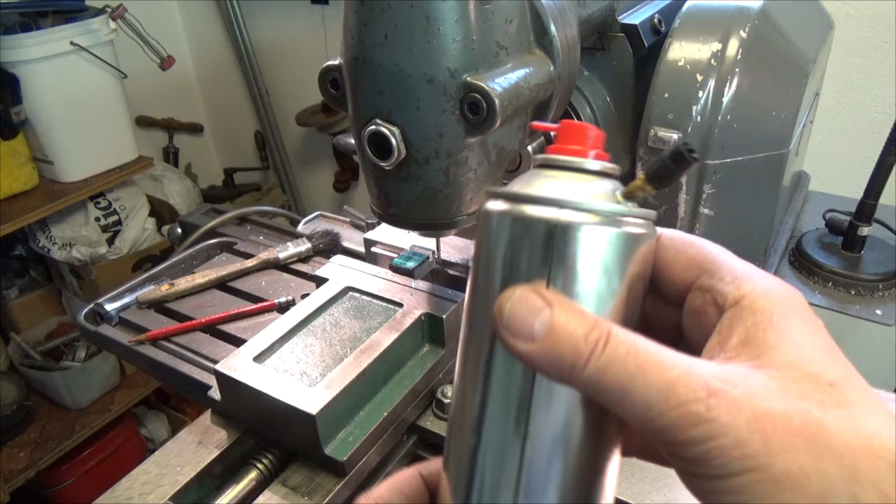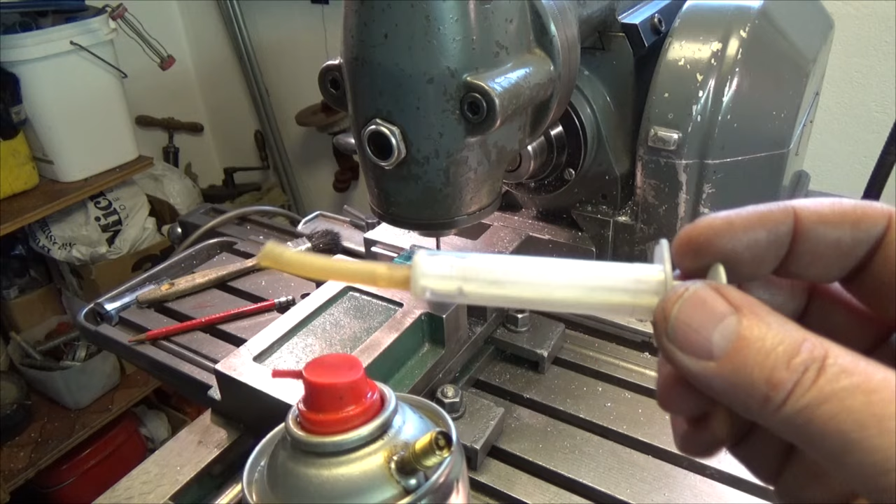I was getting low on cutting fluid on this spray can. As you can see, I have attached it with this valve, a car tire valve, and I screw out this in the middle. I don't know what it's called in English. In Swedish it's called kägla. And then I'm using this to fill it up.

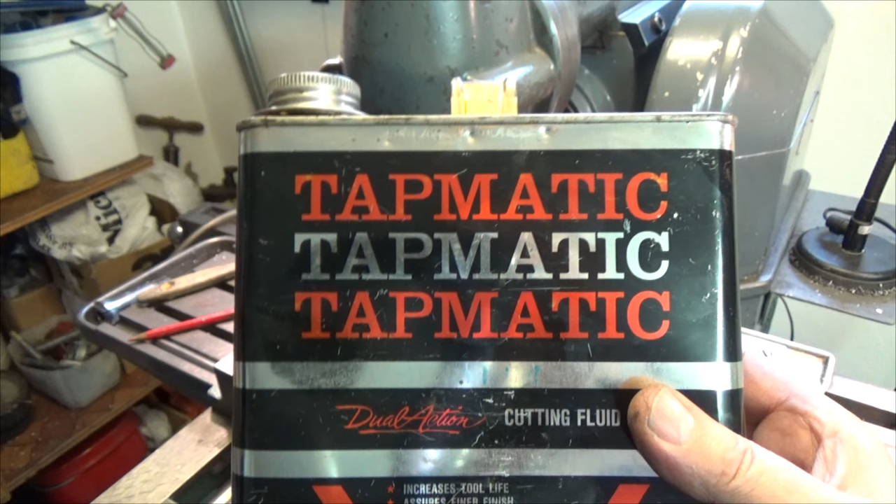And for cutting fluid I'm using Tapmatic. And this is especially made for aluminium. But the level is getting low in this container, so eventually I will run out of Tapmatic. I don't know if you can buy this in Sweden. In USA you can, of course, but I haven't checked if you can buy it here in Sweden. Anyway, let's go on with the milling.

Oh, and I fill this with 5 bar air pressure, and it's working great.

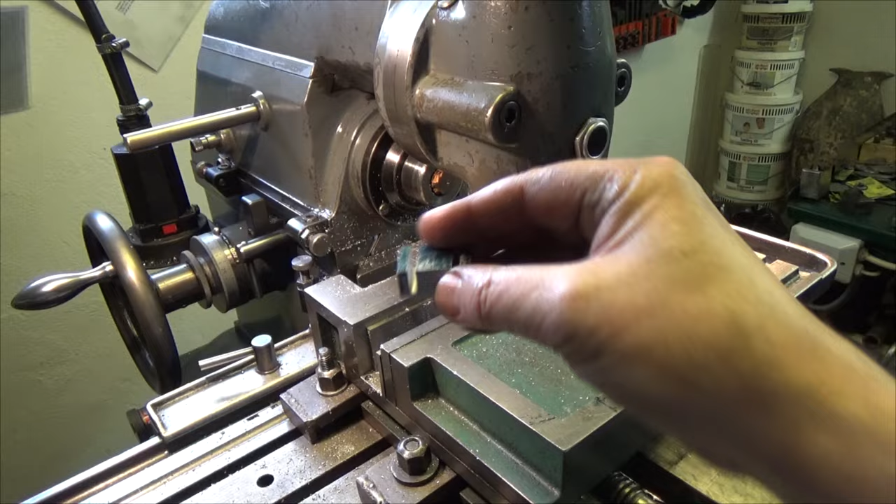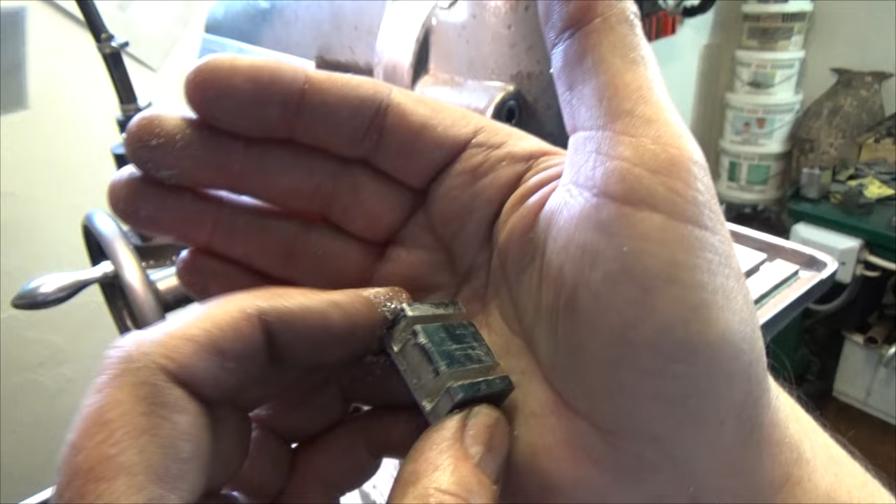Well, that went smooth, I think. No incidents. I do the other slits off camera, and if anything unusual happens, I'll let you know. As you can see, everything went smooth and all right. And I don't think I'm gonna mill a slot here in the center. Anyway, not just now.

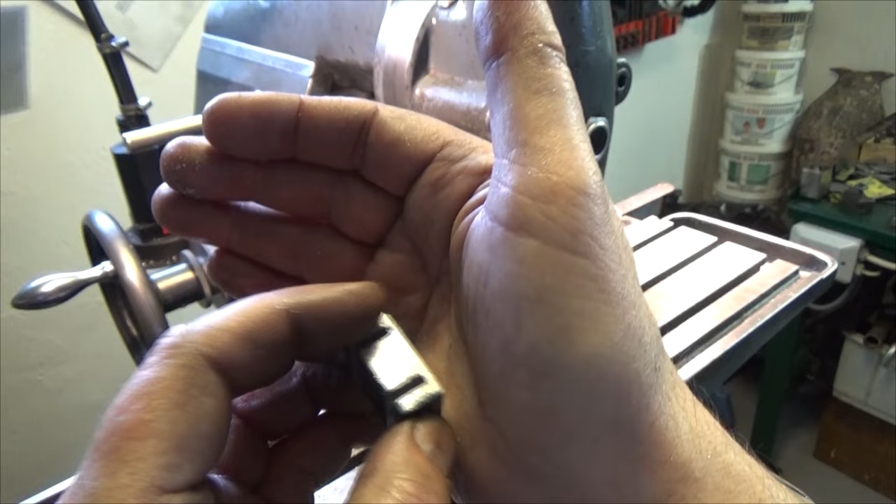And let's move on. Next thing, drill 2 holes. I have done that in the base plate, so I'm not gonna show this on camera, unless something unusual should happen.

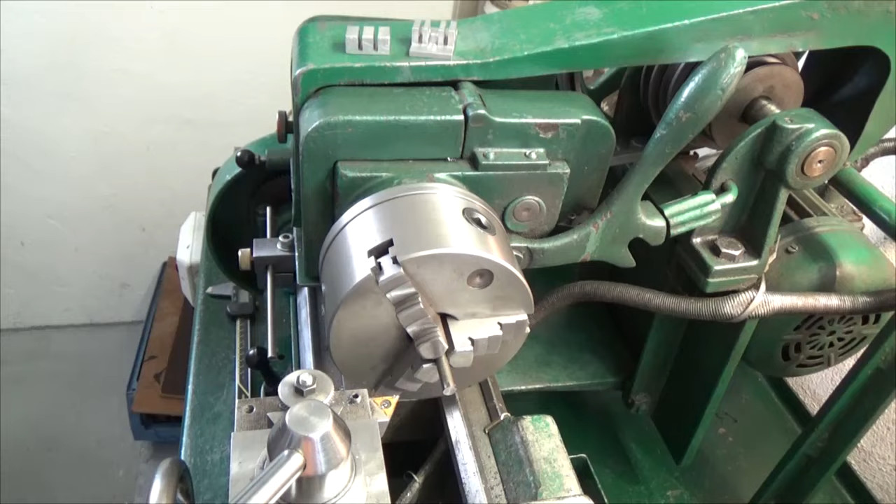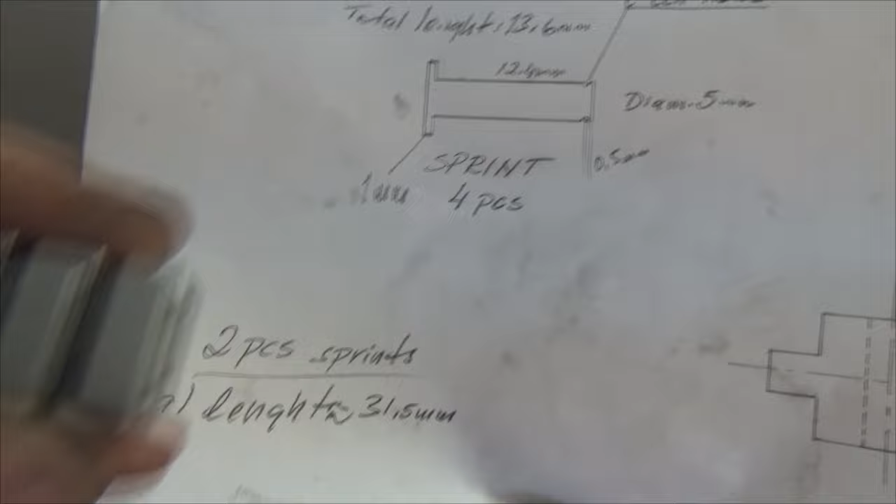Next thing to do will be to make 4 of these pins that go through these holes to lock the arms in place, and 2 little longer pins that will suit this top plate, and those pins are going right through here. Okay, let's start work again.

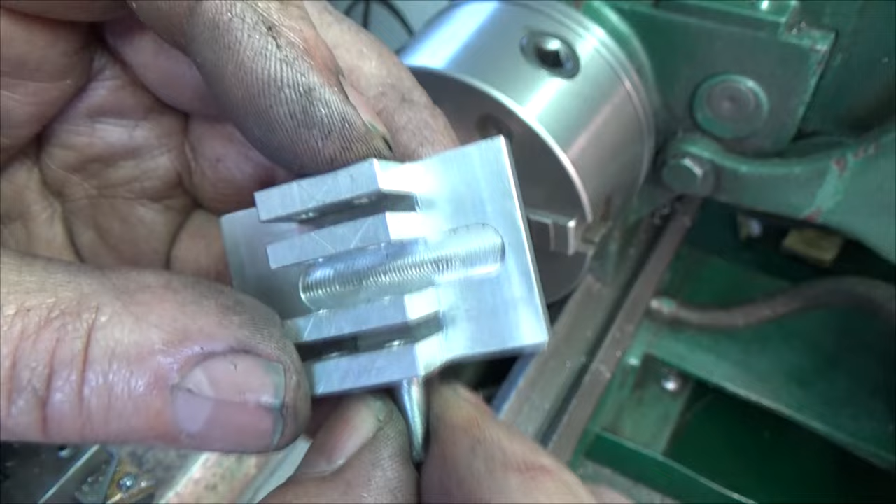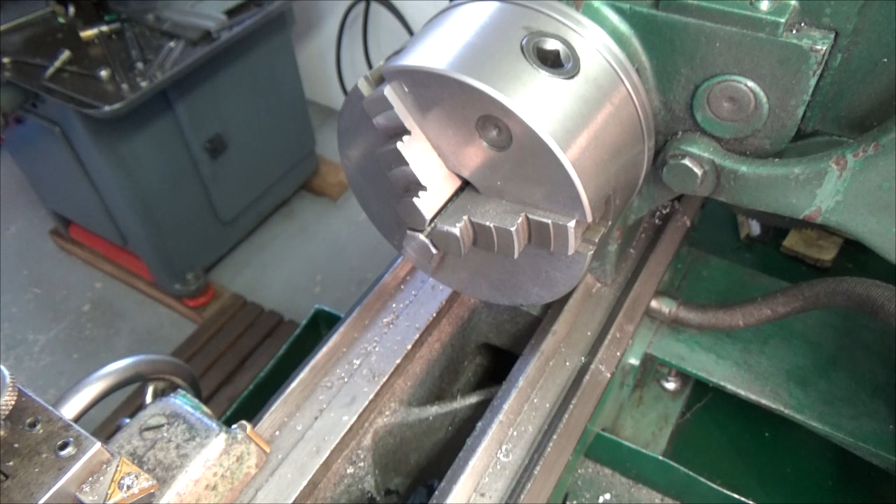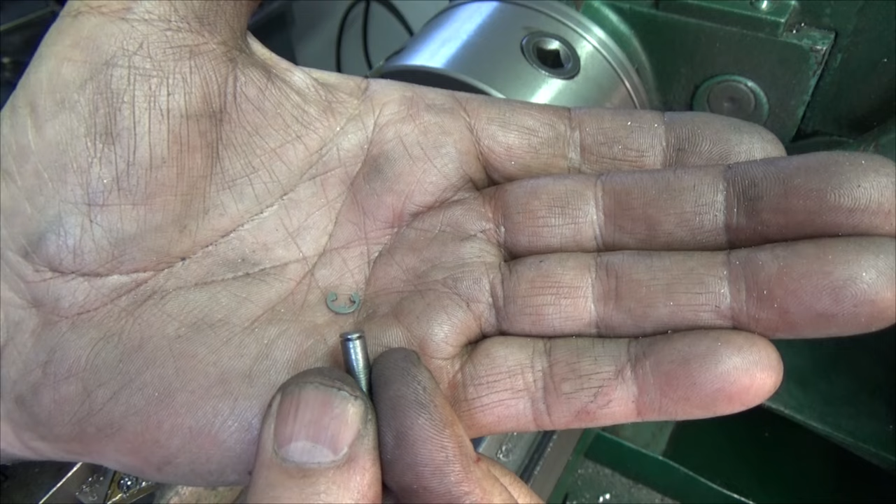Okay, here we have one of these 4 pins that's going in here, and this little C-clip will go on the groove to lock it. I got a few more of these to do, but I do that off camera.

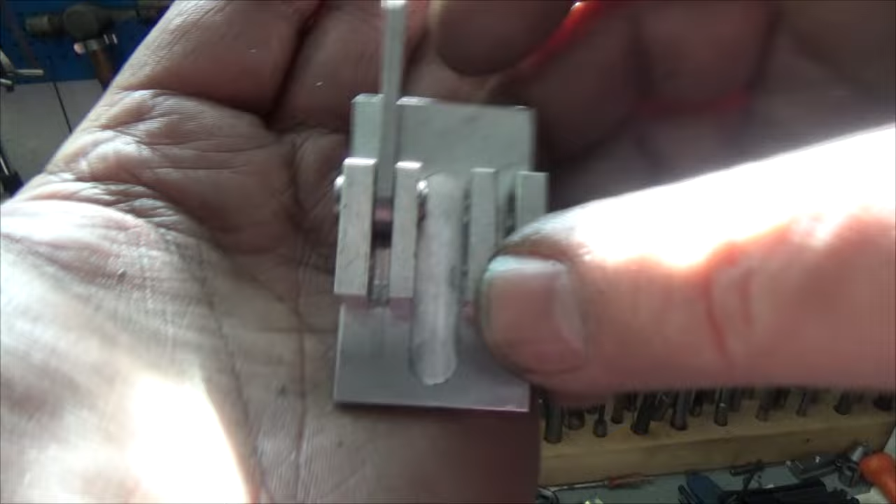Here are the pins, and there's one missing, isn't it? Well, actually not. I have mounted one for testing in the base plate, with the C-clip mounted too.

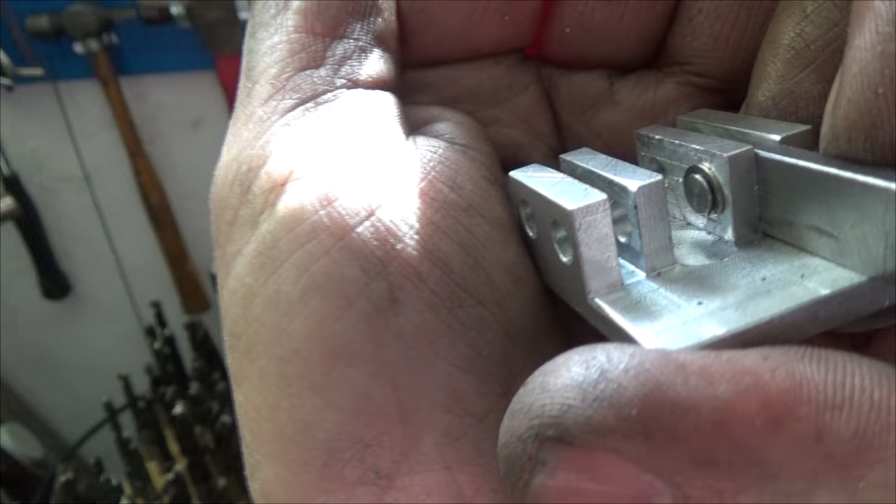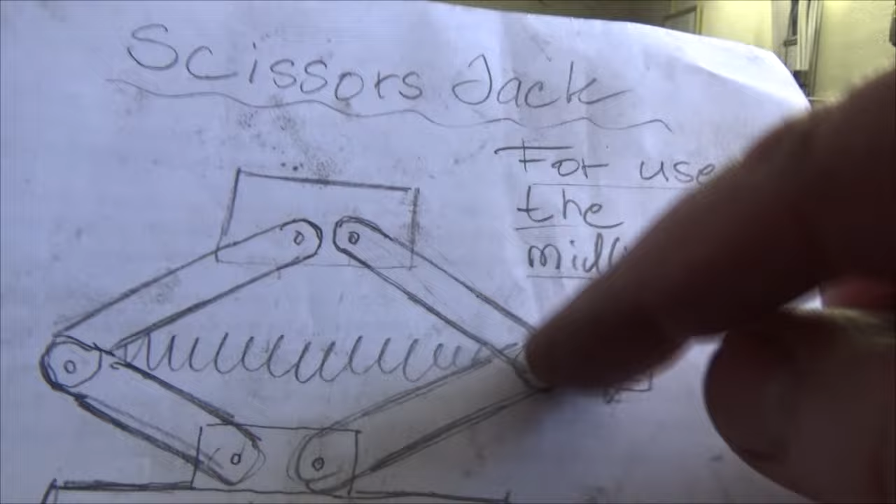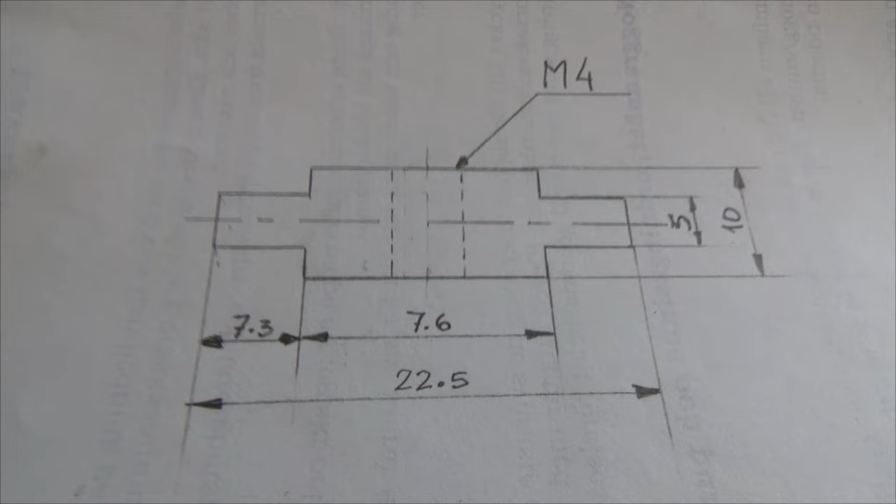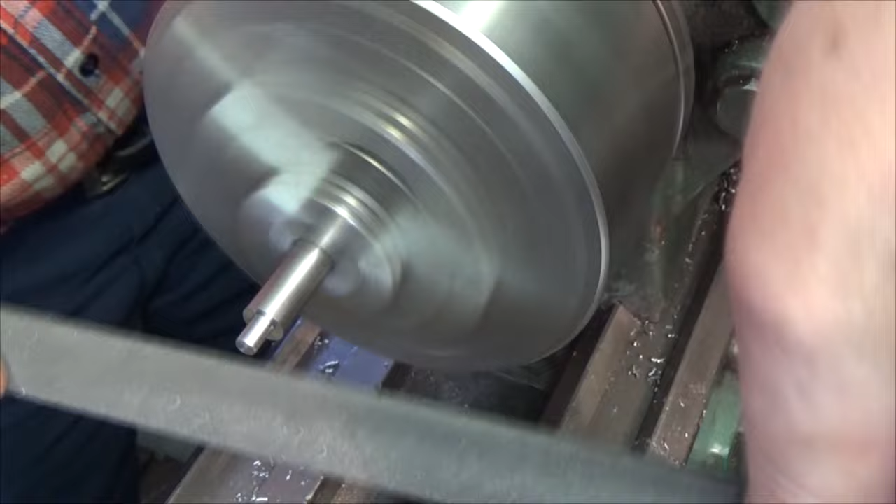Next thing to do will be these things that sit between these arms, and I have made a simple drawing of one. It looks like this, and one will be, as you can see, threaded with M4 thread, and the other one will have no thread on it. Yeah. Okay.

Oops. And here is the final result. I will now drill and thread this part with the M4 thread.

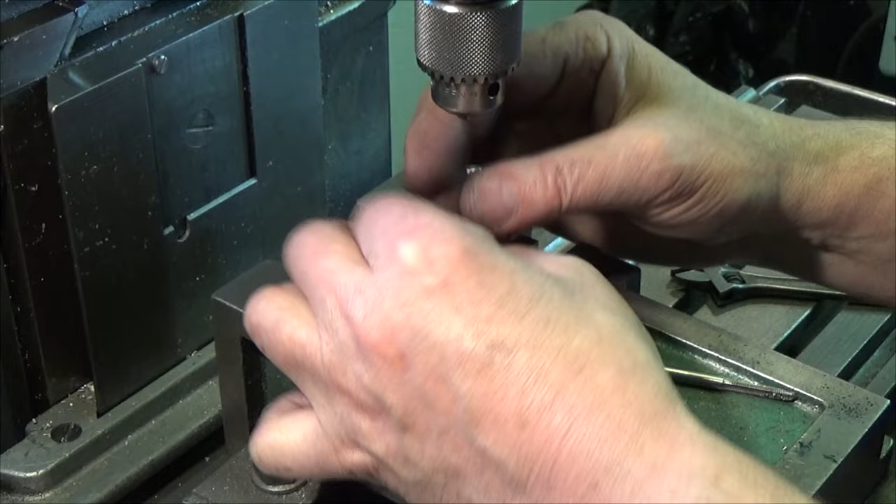Okay, it's threaded, M4, and the other one, which I have made earlier, I will drill a hole in this. Which size I will think about a while. I'll be back.

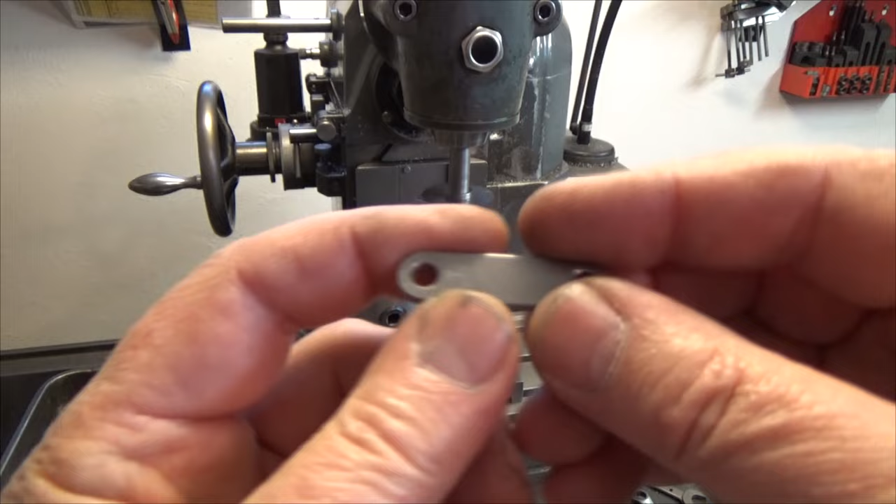On the end of these 8 arms there must be some sprockets, and I intend to use these. I have 4 of them, and first of all I will cut them in half, so they will be about 2 millimeters thick, and then I will mill away 2 millimeters of these arms and solder the 2 millimeter thick gear onto the arms, and do some more machining to get this to work.

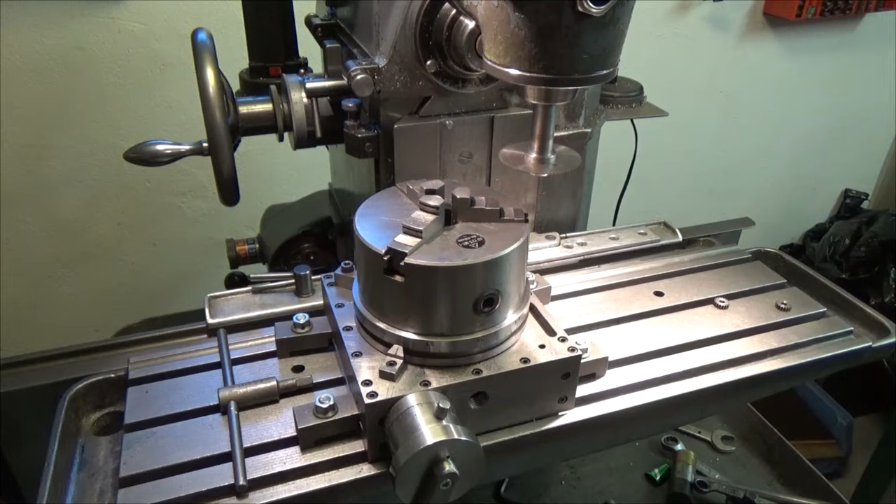I have made a small arbor for the gear, and then I will mount this arbor in the chuck, in this combined round table and dividing head, and cut the gear in half with this slitting saw that is 0.4 millimeters thick.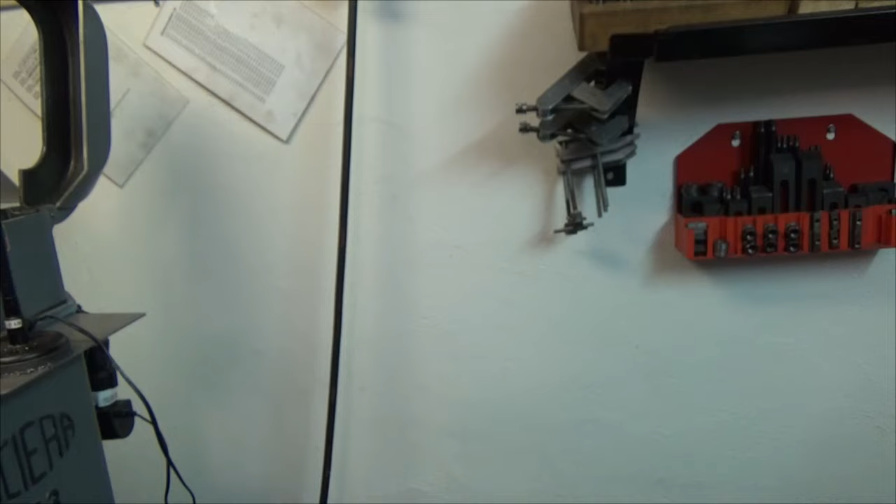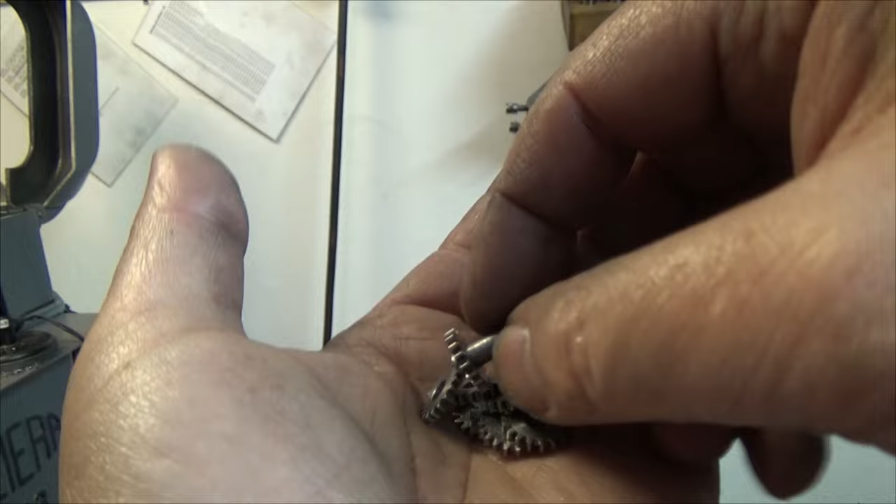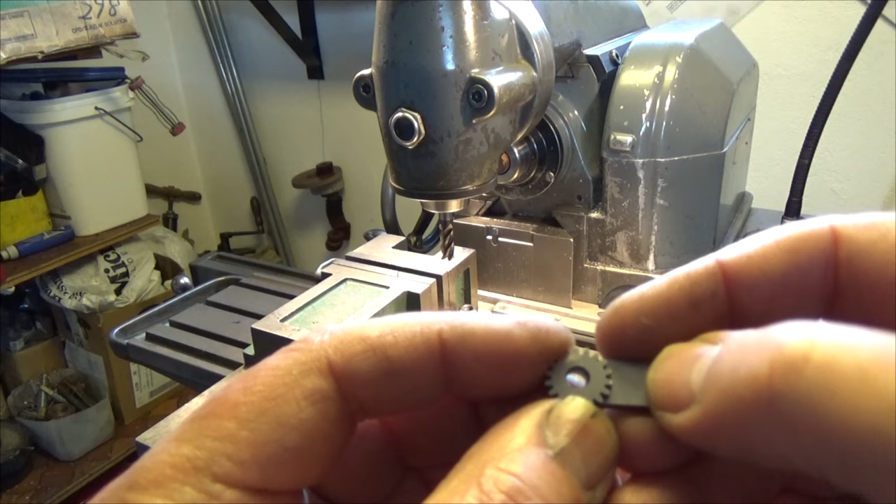So here are the 8 gears. That was 4 gears from the start. Next thing to do will be to mill away a piece here on the gear, about 2.5 millimeters. I will mill away here.

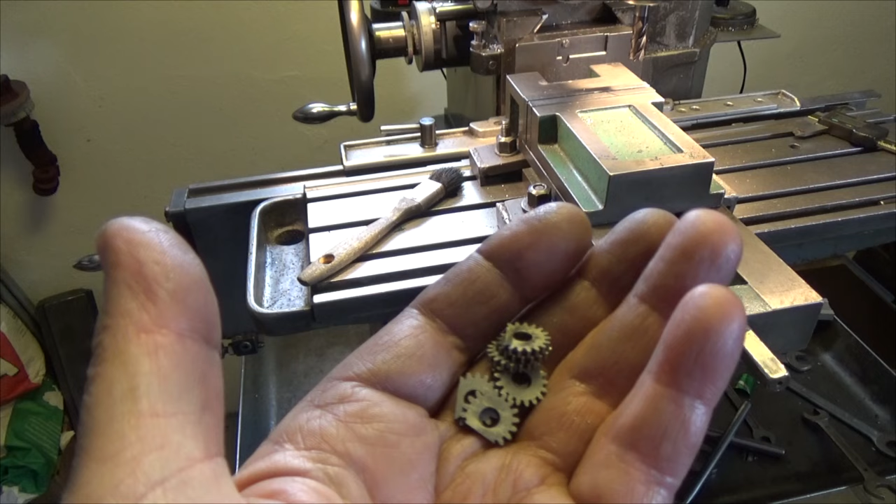Okay, I got some more gears to do the same on. I do that off camera. These gears come from a couple of cordless drills that I have trashed, and they look like this, unmodified. I got this one left over.

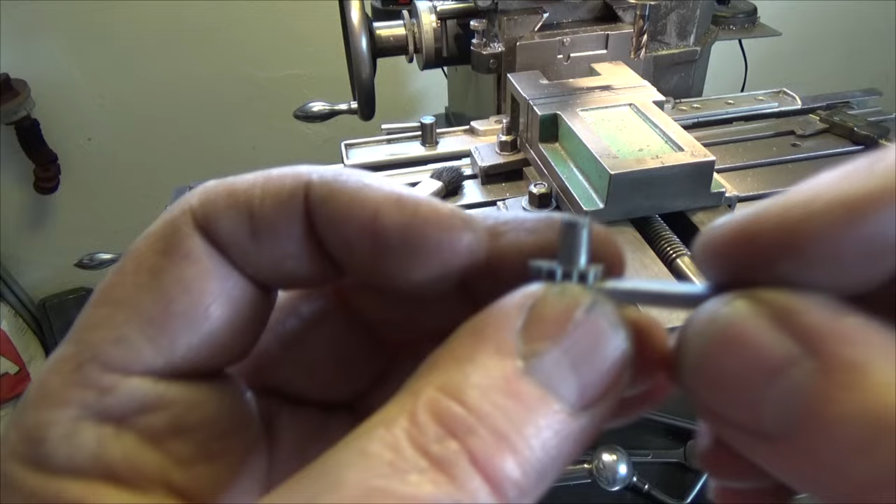Next thing to do will be to mill down about 2 millimeters here, so the gear and this will be at the same thickness, totally 3 millimeters thick.

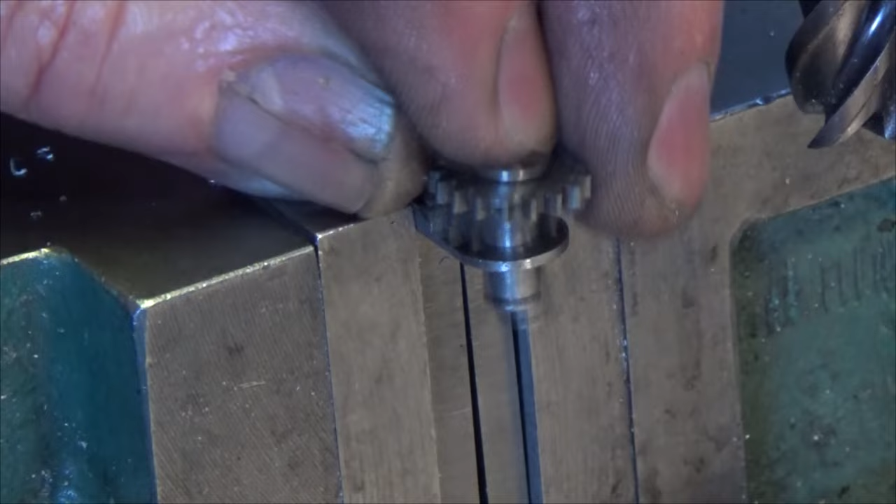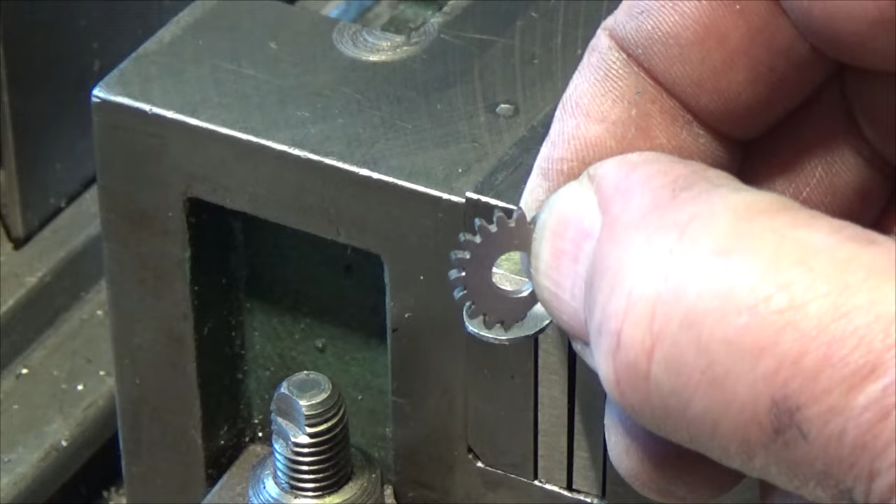So it should look something like this. My plan was to soft solder the gear, but I've tried it and it can't be done, because I think these gears are made of some sort of cast iron, and it can't be soft soldered. It could be silver soldered though, but I think I will try to glue them on and see if that works.

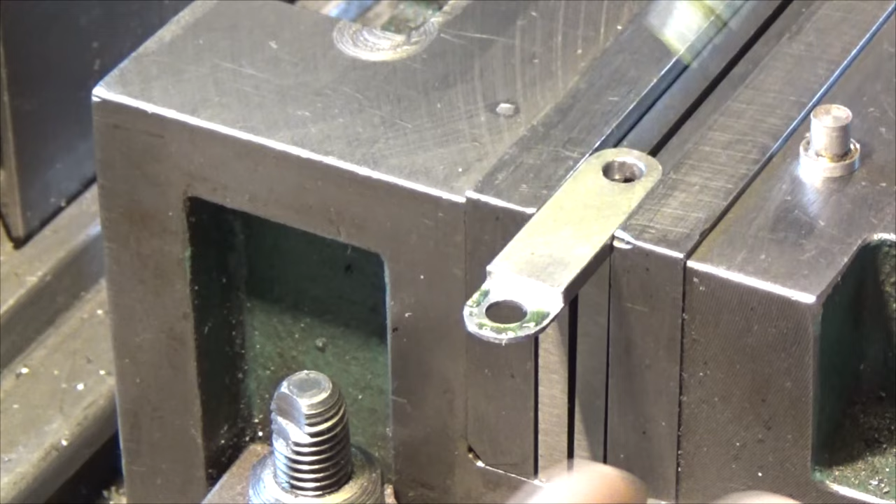Like so. And I think that will do, and we'll see when the glue is hardened.